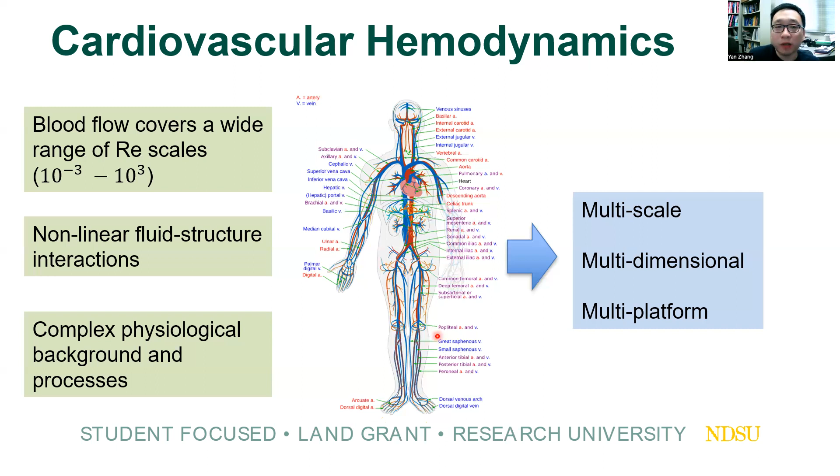And also it involves a complex physiological background, as we will show later. So it requires a multi-scale, multi-dimensional, multi-platform approach. Okay, so it requires a combination of different aspects of efforts, like computational, clinical, and also in vitro experiments to understand all the problems.

So the research method framework for this field can normally be illustrated like this. A problem in the clinical data suggests a problem, and we can use experimental and CFD tools to study the local flow details and fluid structure interaction. For example, for implantation of aortic artificial heart valves, normally patient-specific CFD simulation can be conducted first to examine the hemodynamics before the clinical surgical implementation is taking place. So that was very helpful.

On the other side, there is also system level simulation, mainly based on lumped parameter models, which can involve physiological responses. So consider this human body as a whole. It also can include very complex physiological factors that cannot be studied by experimental and CFD study. In the meantime, system level simulation can also provide initial and boundary conditions with physiological relevance to experiments and CFD. So that is also very helpful in terms of providing waveforms of pressure and flow, and also the boundary conditions.

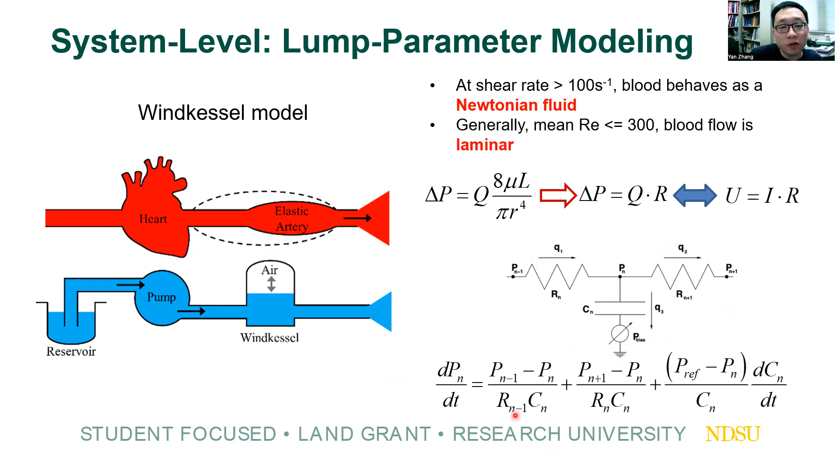Also, of course, you have the pressure outside the blood vessel, which is the interstitial pressure. It controls how much the volume can change during a heart pulse. If we build it this way, then for each Windkessel unit we can build an ordinary differential equation like this. And if we consider the human circulation, we can segregate the whole circulation into different compartments, then combine them together to build this closed circuit model.

This is built based on an open source code developed by MIT back in 2002. It consists of 21 Windkessel compartments. For example, here you have the upper body veins compartment, microcirculation, artery, etc., and the lower body, abdomen, and different organs that are important. All of these resistances and capacitances are based on physiological clinical data from literature. All together we have 21 compartments, meaning 21 ordinary differential equations. Then we can solve them using the Runge-Kutta method. And of course, there are more details; we're going to talk about them in the next few slides.

So here we need to pay attention to some of the most important circuits. First is the heart chamber, and also the lung compartment, the microcirculation, and the vein compartment. Okay. So the heart compartment, because the heart is such a unique compartment, it has 4 heart valves to control the one-directional flow. So we use diodes to regulate the one-directionality of the flow.

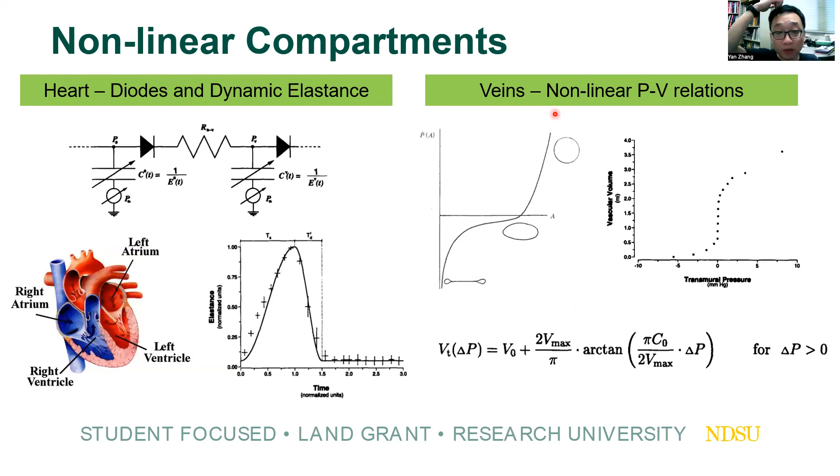Okay. On a side note, we are currently doing some research related to the nonlinear fluid structure interaction in the collapsible vein. Some of the results are shown here: we're investigating what is happening when you change the transmural pressure between the internal and external space at different Reynolds numbers. We replicate this thin-walled tube, the vein vessel fluid structure interaction. You can see as the pressure decreases slightly negative, we have this collapsing cross-sectional area.

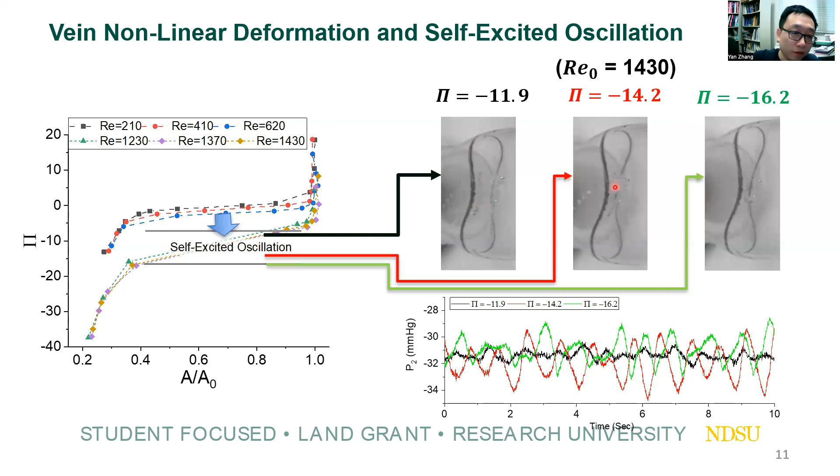And also we found that as the Reynolds number increases above a certain critical Reynolds number, it starts the self-excited oscillation, which is a well-known phenomenon in the Starling resistor. So while you have a pressure drop, it starts this kind of self-excited oscillation.

Okay, so going back to the cardiovascular system model, another unique feature of the system level simulation is that we can consider the human body as a really complex physiological system. One of the features is that our body has this short-term control system. So for example, if the blood pressure is under certain situations, we have these sympathetic and parasympathetic signals that can control our system to adjust the blood pressure, either going up or going down, right?

So for example, in fight or flight situations, when you become nervous, the autonomic nervous system will signal the sympathetic nervous system to give a plus signal to increase the heart rate and also contractility, the resistance of the arteries and the venous tone, so that you can adjust the blood pressure accordingly. Under other situations, the parasympathetic signals will be activated, giving the opposite signal to decrease the heart rate, resistance and venous tone, changing the blood pressure in the opposite direction.

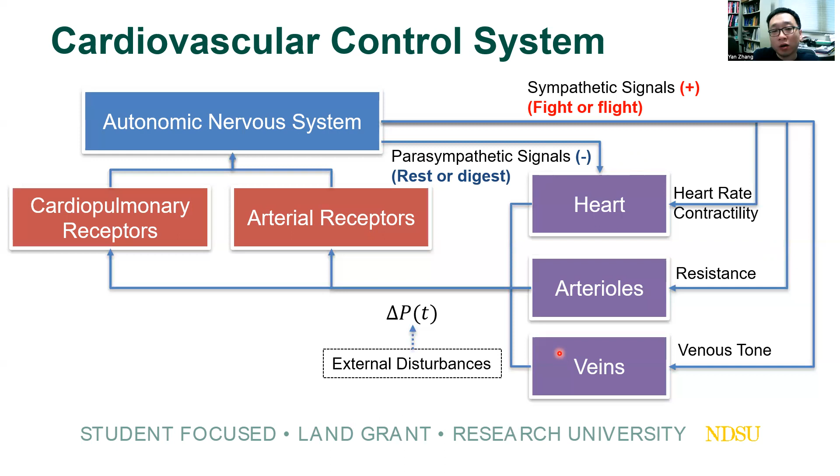So in the cardiovascular system model, we also consider this as a set point control algorithm, based on the clinical data. So overall, by solving these 21 equations with all these physiological data and the control system, we are able to generate a realistic physiological output from the CVSim model. So here is an example of the pressure waveform we generated for different pressure nodes, including left atrial, left ventricle, and the systemic artery and the venous pressure.

So you can see it represents the pressure wave pretty well. It can generate beat by beat hemodynamics at all different locations, on a time scale of seconds. However, it does not have long-term effects, and it represents a closed fluid system, with no input and output. So later on, we will show that we modify the system to study different kinds of physiological problems.

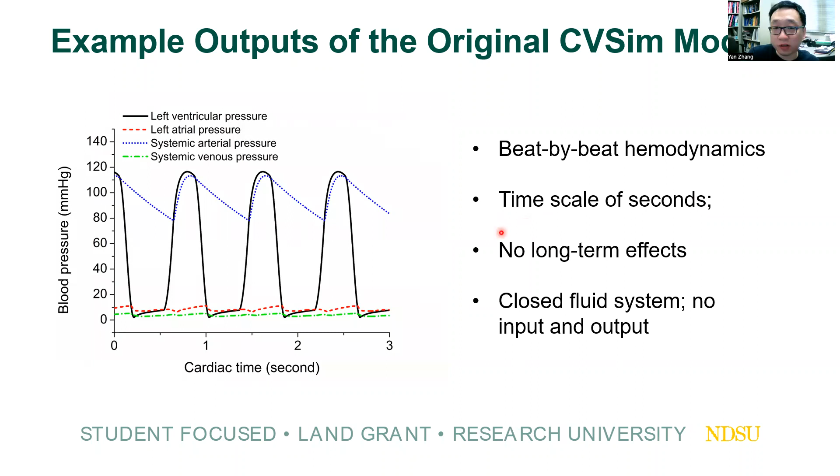The first example application I'm gonna talk about is the digital astronaut project. This is a project funded by NASA to study how a person's hemodynamic parameters can change with microgravity exposure for a very short time, and also the effectiveness of countermeasures to counterbalance these changes, using a numerical model.

So we're using that CVSim model to simulate this kind of short-term effects. As we all know, the astronauts go to the microgravity environment, so the blood will actually shift toward the upper body, toward the head, because there's a lack of gravitational pull, right? Under Earth gravity, the blood pressure in the legs is actually much higher than the heart level because of the hydrostatic pressure gradient, and in the head it is much lower than the heart level.

But in microgravity, the gravitational gradient disappears, so the pressure is actually more uniform. It results in the blood shift from lower body to upper body. This can cause a lot of different problems, including the puffy face. The face will look really dilated, and also impaired vision because the blood will pool in the eyes. Also orthostatic intolerance: when astronauts go back to Earth's gravity, they cannot stand up because the blood pressure cannot go back to the head immediately because of that adaptation.

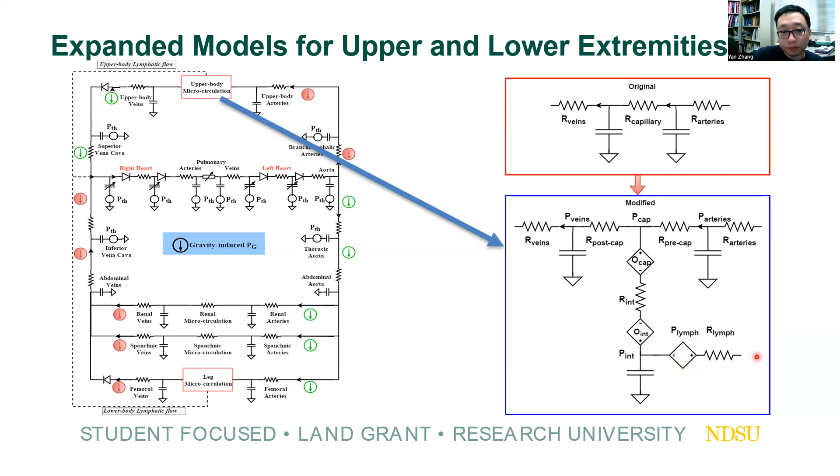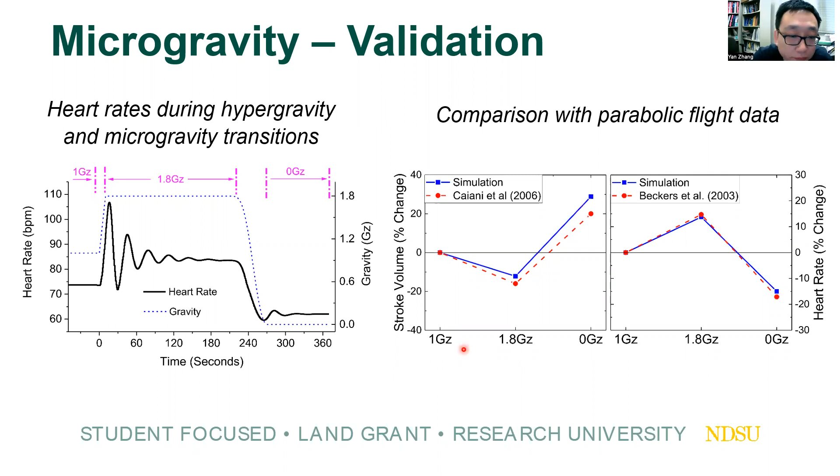Also, our model predicted the headward fluid shift. You see here the blue line representing the lower body vein blood volume. You can see that it really decreased and shifted to the upper body vein after the transition. And you see the blood pressures of the upper body and lower body actually approaching each other, representing a more uniform pressure gradient.

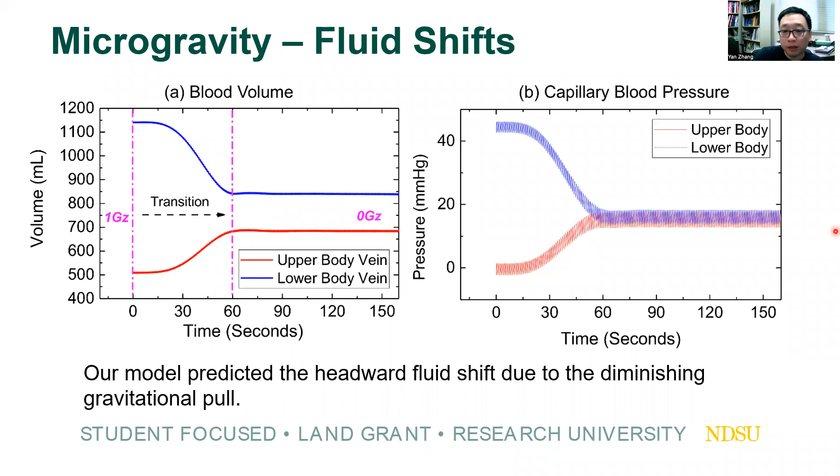We also tried to simulate the lower body negative pressure. You can see here it is 1G and suddenly becomes 0G. Then once the LBNP mechanism is activated, you can see the heart rate and central venous pressure are both restored to some degree. Really, you can see that a negative 30 millimeter mercury LBNP is pretty effective in restoring the hemodynamics under microgravity.

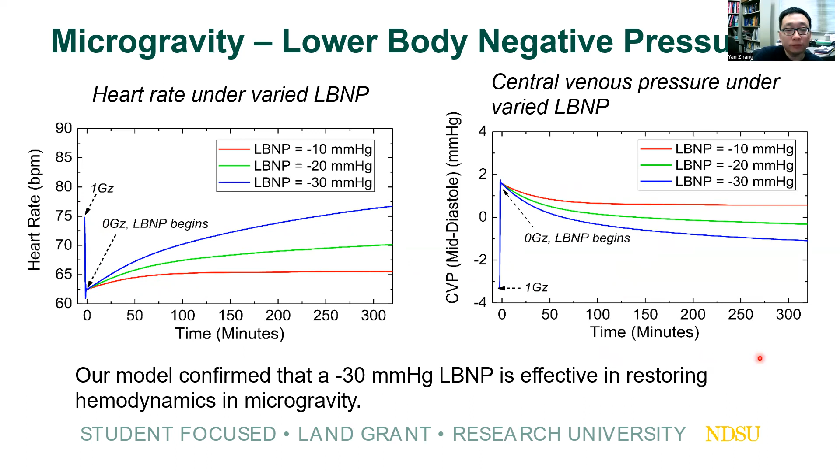So the second application is that we also want to study the longer term effects of the CVSIM model, because that model is really beat-by-beat hemodynamics. It does not have any input and output of fluids. So we want to include this water intake and also water exit, and also simulate the long-term effects, which are controlled by the kidney.

So we want to add the renal system model, or kidney model, into CVSIM so that we can study the effect of disturbances in the longer term. For example, high sodium and low sodium intake and water intake on hemodynamics. This is actually earlier research motivated by the effects of high sodium intake on blood pressure. So we include the renal system model, and we know that the kidney is a really sophisticated filtration system.

The kidney actually consists of a million of these small units we call the glomerulus unit, which works to filtrate the water and electrolytes at different locations. So the artery goes in and the filtration goes on. After filtration, the blood flows back through the vein. Then the excretion gets out of the body through the urine flow.

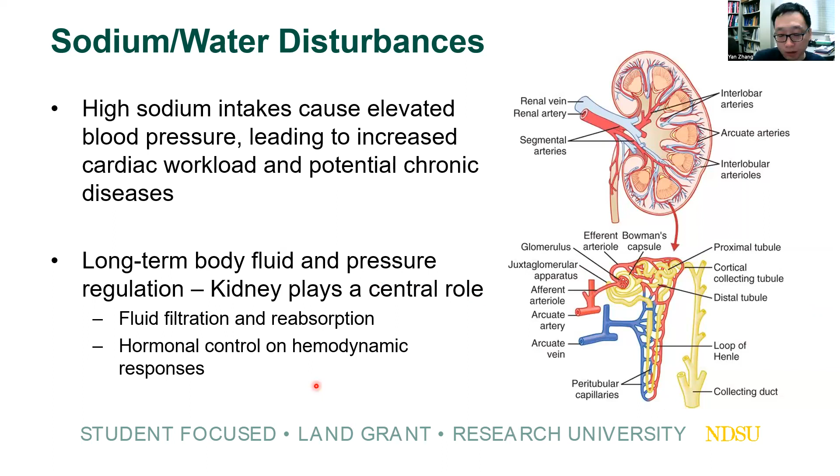In the meantime, the kidney is also a long-term control organ that excretes hormones to regulate blood pressure. So those are the two functionalities of the kidney, which are important for long-term hemodynamics. So we modeled the renal system in this green block. Really complex functions, but most of them are either ordinary differential equations or algebraic equations from

the literature data. So basically it takes the blood flow from the CVSIM model, filtrates this water through this entire process, and then feeds back into the venous return of the CVSIM model. In the meantime, it also has hormone concentration modules to control blood pressure and blood flow. So basically it added another 69 equations.

And again, it is solved with the Runge-Kutta fourth order method. This time it can use a larger time step because it's longer term; we simulated with a time step of 1 minute. And it can simulate effects of different disturbances on a time scale of days. So we can use this modified CVSIM model to simulate different time scales of hemodynamics, for example, water intake effects on the time scale of hours.

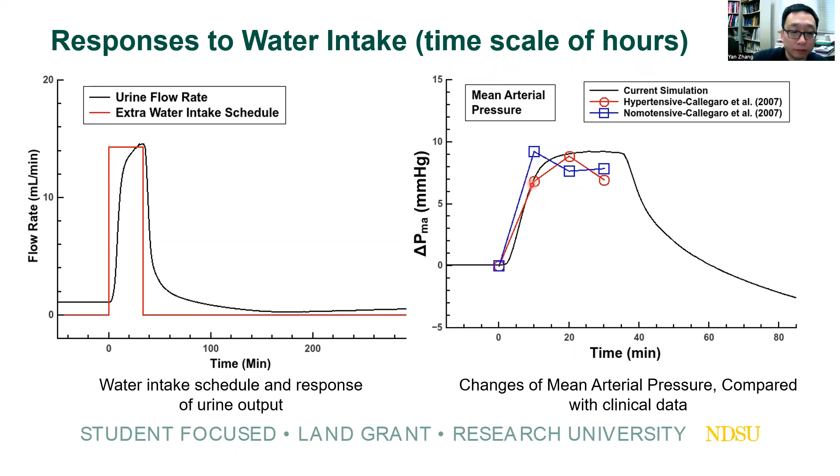For example, if you take water in this time window, we simulated the urine flow rate responses and also the mean arterial pressure. This compared with some clinical data pretty well. We then used this model to simulate the long-term effect of sodium intake on hemodynamics. For example, here we simulated some of the clinical results. Here we have a regular sodium intake. Then for 2 days, we doubled the sodium intake and then restricted the sodium intake in the longer term.

What we found is that the plasma sodium concentration change matches well with the clinical data. And here you can see the urine flow matches well, and different hormone concentrations in the blood also match the results pretty well. So using that, we can study the sodium restriction effect on arterial and heart hemodynamics. Here we studied a restriction of sodium intake. You see different steps of restriction.

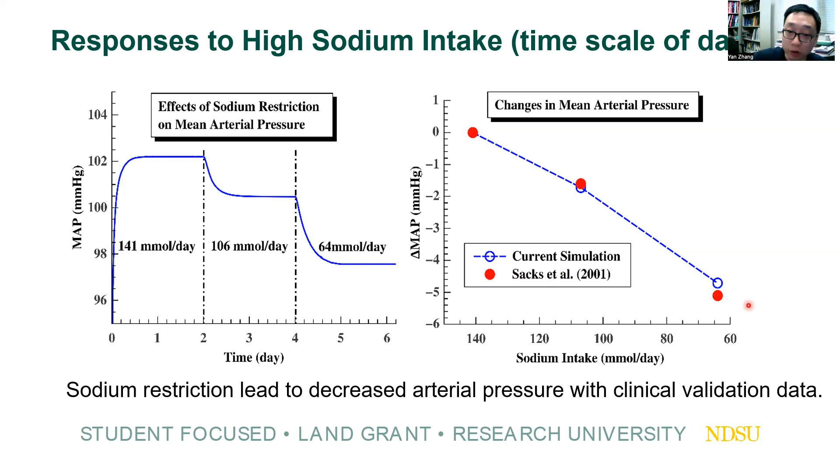You can see once it stabilized, the mean arterial pressure actually drops about 1.5 to 5 millimeters of mercury in the long term, which matches these clinical data pretty well. We are also able to show the pressure-volume loop of left ventricle work. As the sodium restriction occurs, from 300 millimole per day to 64 millimole per day, you see the loop is actually shifting to this side.

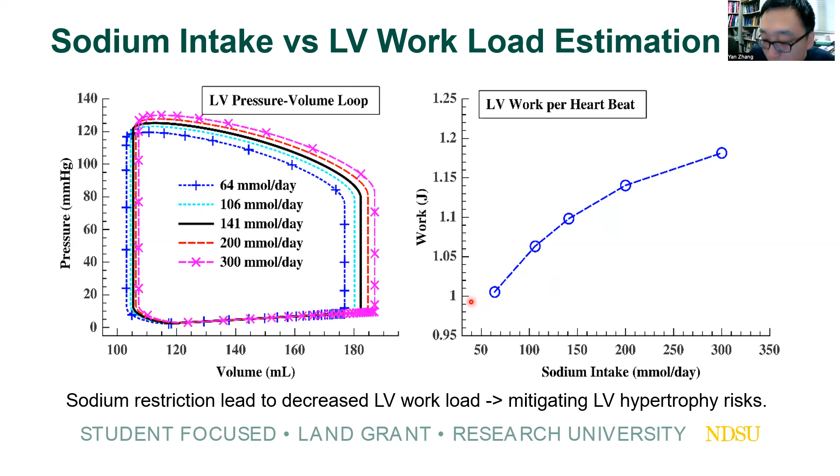Also, the area is smaller, meaning that the pressure and volume actually decrease, and the total work is also decreasing. If you calculate the area, that's the workload of the left ventricle. You see that with sodium restriction, the workload is actually decreasing, as predicted by the model. So it leads to a mitigation of the risk of left ventricular hypertrophy in the long term. That confirms some of the common agreement in this clinical field.

As a summary of this part, we modified the open source lumped parameter model, CVSIM. It turns out to be a very powerful and expandable tool for different physiological and physical phenomena of the cardiovascular system. It can be extended with different functionality. It can study hemodynamics on time scales of minutes, hours, days, or even longer. So it's very useful in that sense. But of course, more validation is needed; more valid physiological data is needed to improve the model in the future.

The lumped parameter model can also be used as a very good tool to provide boundary conditions, pressure and flow waveforms, for CFD, FSI, and experimental studies of local hemodynamics in the future. So that's the first part of my talk. In the second part of my talk, I'm going through some of the in vitro cardiovascular flow experiments that we have done, including heart valve, aortic arch, and left atrial appendage, to study some local blood flow phenomena.

So the motivation in our lab is that we want to study cardiovascular system hemodynamics, because cardiovascular disease is a leading cause of death. About 20% of deaths in 2021 in the United States resulted from cardiovascular disease, either atherosclerosis, stroke, arrhythmia, or heart valve complications. These are some of the really common situations. The population of patients with CVD is also increasing dramatically in recent years.

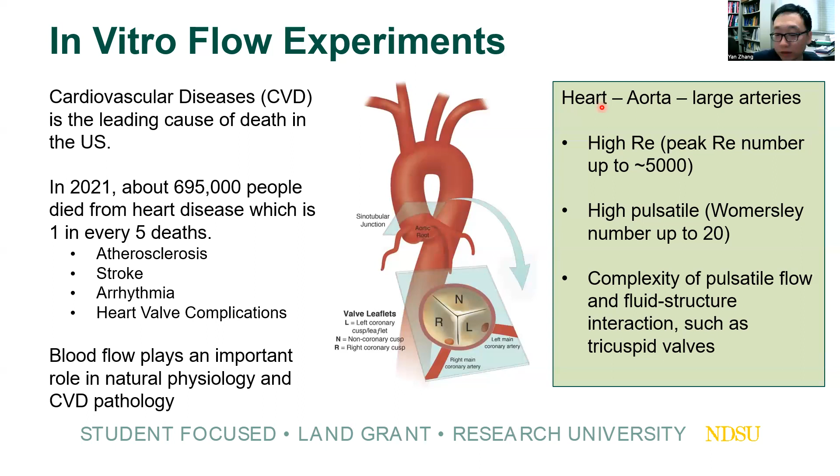So in our lab, we actually established a cardiovascular flow simulator, something like this. We have a programmable pulsatile waveform generator, so we can generate any arbitrary user-defined waveforms. We have the pump head to control the one-directional flow. Then we have high-speed sensors, pressure sensors to monitor the pressure, and the test section used to host the models.

And then we have compliance and resistance units to regulate the pressure and volume relations, as represented in system-level cardiovascular simulation. So we want to adjust the pressure volume relation, and then the fluid reservoir to mix the particle seeding and also serve as the holder for the entire fluid. So this can be used for PIV measurements. It can be synchronized with the PIV laser and the cameras.

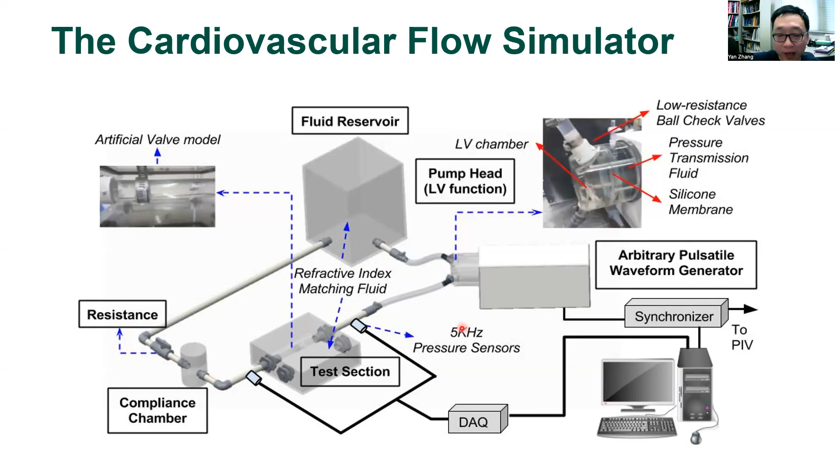And we can do refractive index matching, because we're currently using a lot of PDMS silicone models to allow optical access. That's the main thing we're using right now. As for the optical flow visualization, we're doing PIV. For particles we're normally using polyamide microspheres.

Refractive index matching is very important, because a lot of these models have a complex circular cross-section resulting in optical distortion. So we use water-glycerol mixtures, about 40% water and 60% glycerol, which have relatively the same index of refraction as the PDMS material. As you can see the result of the matching, afterwards the distortion is basically eliminated

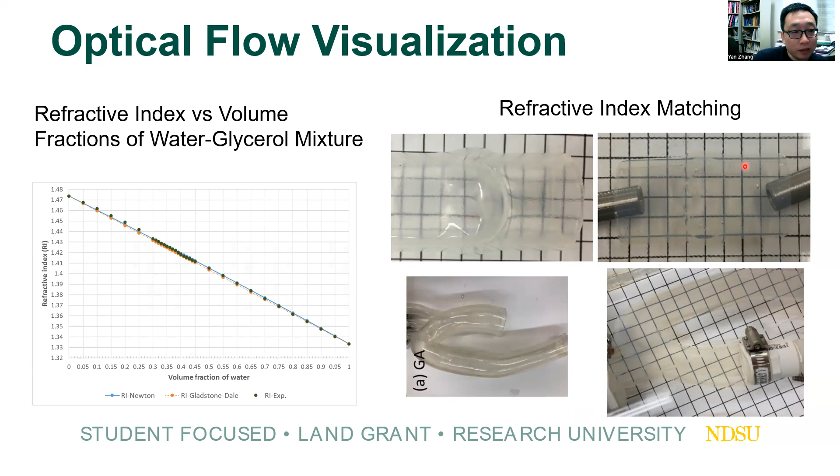from the model. Using the pump, we can generate pulsating waveforms, something like this. You can see here what we call systole, the contraction phase of the flow, resulting in a larger pressure gradient and flow. And then we have the diastole period, which is an expansion of the pump. With the one-directional valve here, you see we can actually get to zero flow during the diastole period. So we can study different kinds of flow rates and heart rates.

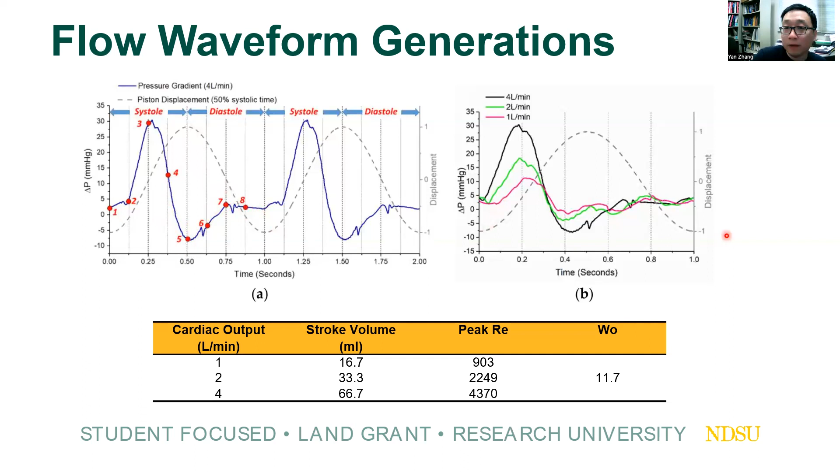So here's one PIV result of the pulsating flow passing the aortic valve. We're studying what the flow passing these tricuspid valves looks like, and how that interacts with different structure deformations. You can see at different phases of the pulsating flow, we can observe different jet flow patterns. At the peak, there's a jet in the center, and in the diastole phases, you can see the valve is actually closing, resulting in non-uniform jet flow towards the end of the systole phase.

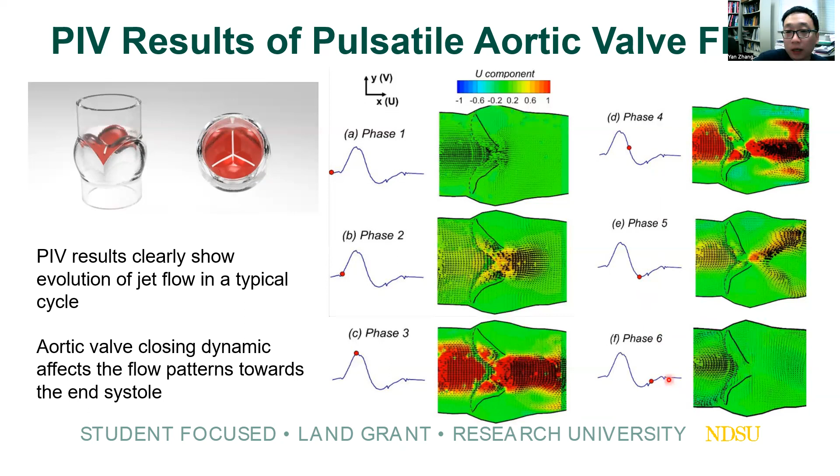And then we can also estimate the deformation of the aortic valve, because this PDMS is made of soft material. Even though that material is a linear elastic model, which is not actual real tissue, we actually can see some of the trend of how they deform under pulsating flow conditions.

So we measure the area strain, which is the change of this cross-sectional area at the different locations under different flow rates and different phases. So you can see here that the aortic annulus normally represents the largest strain, regardless of the flow rate, right? So this orange bar shows the area strain of the annulus is the greatest, which is before the aortic valve. And also, in the time axis, you can see the area strain of the aortic annulus is actually changing earlier than the peak, before the peak of the flow.

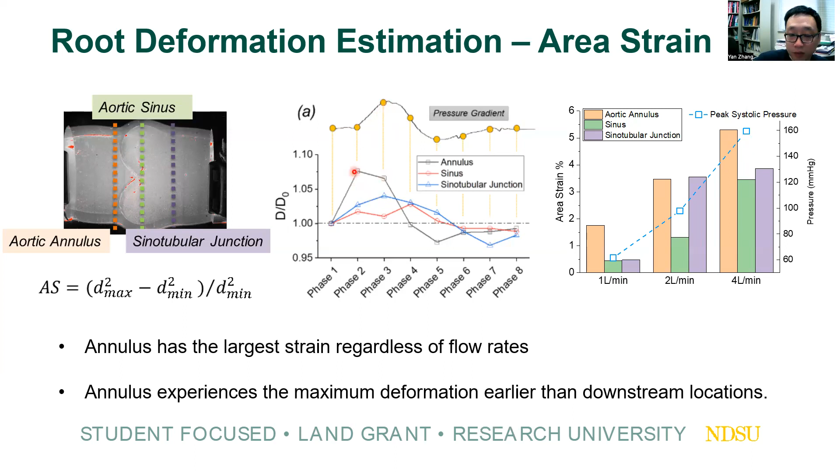We also studied aortic valve stenosis. We manufactured another aortic valve with silicone molding, which represents a really, really high Young's modulus. So this one represents a real severe stenosis calcification, and this original one represents a really mild calcification. Compared to the real tissue, it's a little bit stiffer, and this one is more severe.

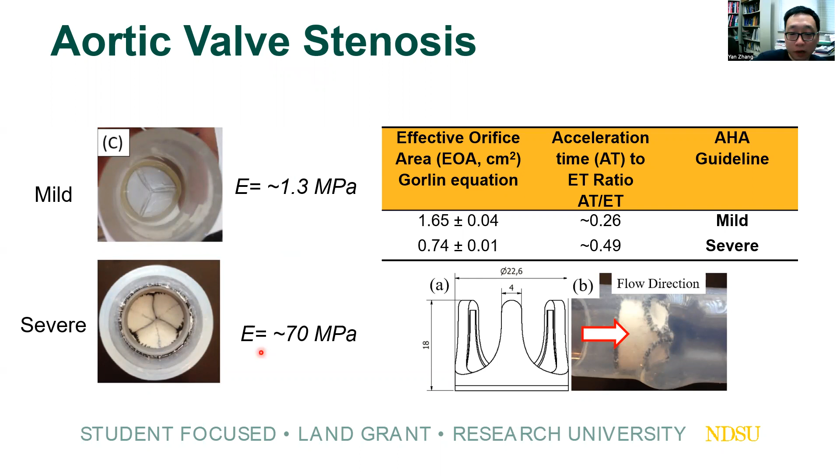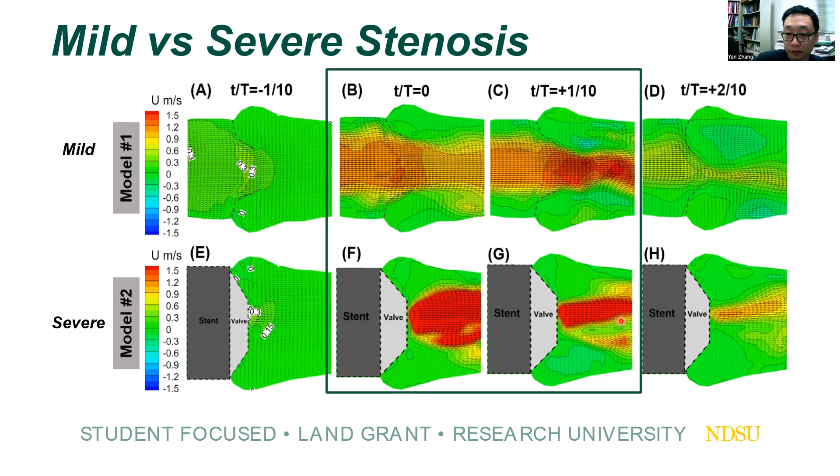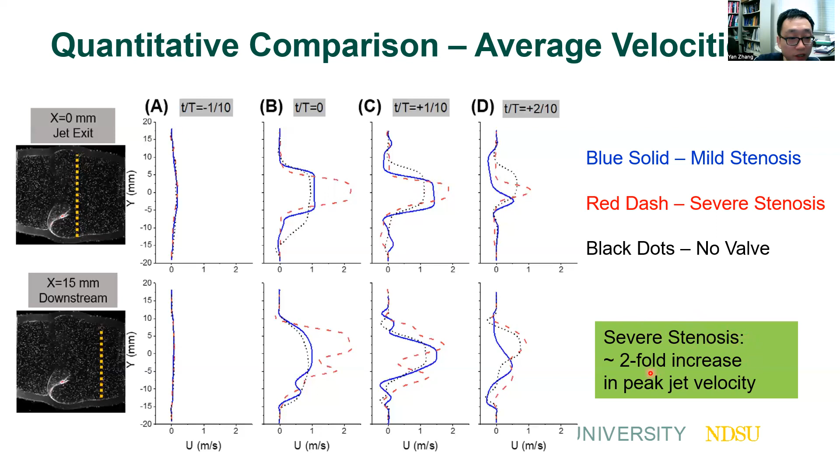So you can see the jet velocity here is really, really high under the severe stenosis case. The mild stenosis case is actually pretty comparable with the no valve case. So the severe stenosis caused a twofold increase in the peak jet velocity, and also turbulence. If you compare the turbulence intensity at different locations, both of the valve conditions result in turbulence intensity higher than no valve conditions, especially severe stenosis, which resulted in really high turbulence after the peak flow. So it causes about a 3-fold increase in turbulence intensity.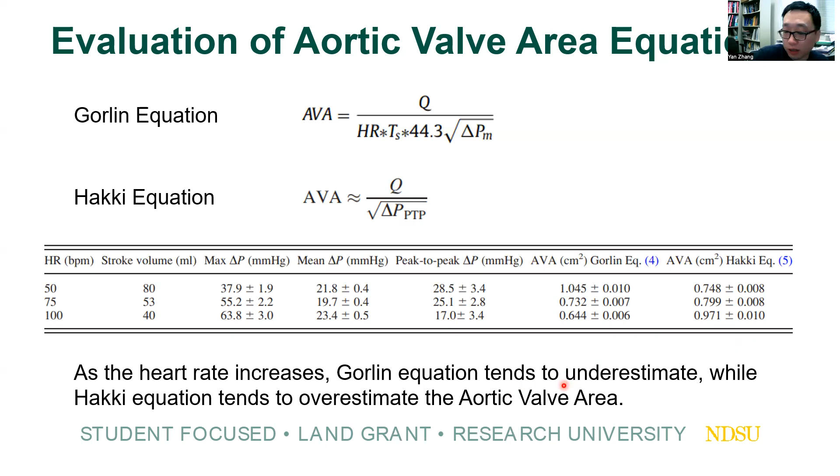So the second type of research we've done is aortic arch hemodynamics. We focus on the deformed aortic arch after surgery for coarctation of the aorta. Coarctation is basically a narrowing of the aortic arch, normally in congenital heart disease, and a lot of babies are born with this condition. After the surgery to remove this section, a lot of patients develop different kinds of deformations of the aortic arch. One of them is really sharp; we call it the Gothic arch.

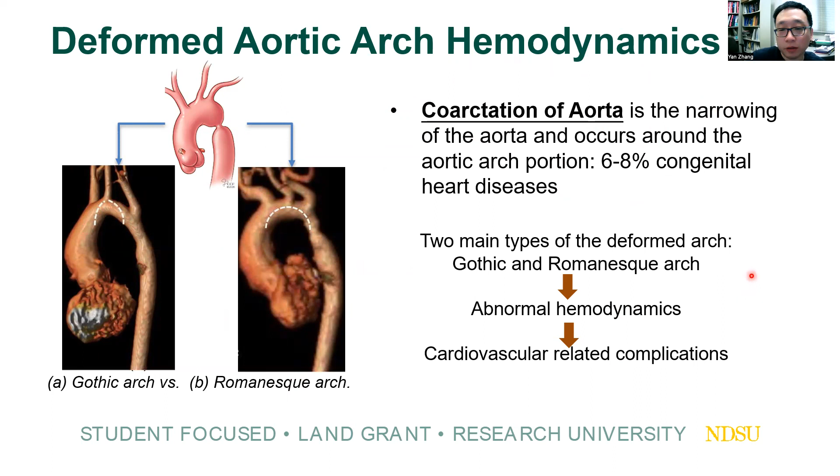The other is Romanesque, which is really round. These two names come from European architecture styles, right? Gothic is really high, tall and sharp, and Romanesque is a really round arch. So these different deformations result in different hemodynamics. What we wanted to do is to reveal the flow structures, so we did tomographic PIV on this problem.

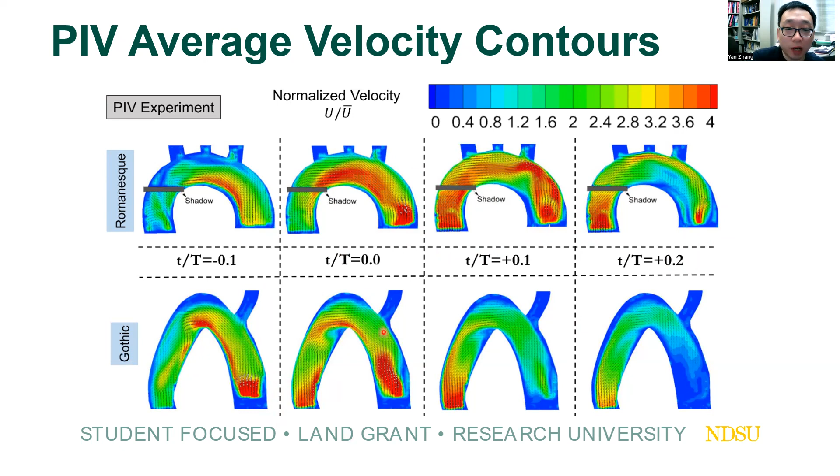So you can see here, the flow is going from right to left. In the round Romanesque model, the flow is pretty uniform in the cycle, while in the Gothic, large flow separation and stagnation occurred. On the top you can see the flow stagnation, almost zero velocity near the top, and flow separation occurs around this sharp curvature. We also collaborated with CFD simulation here, and the CFD results match the PIV pretty well.

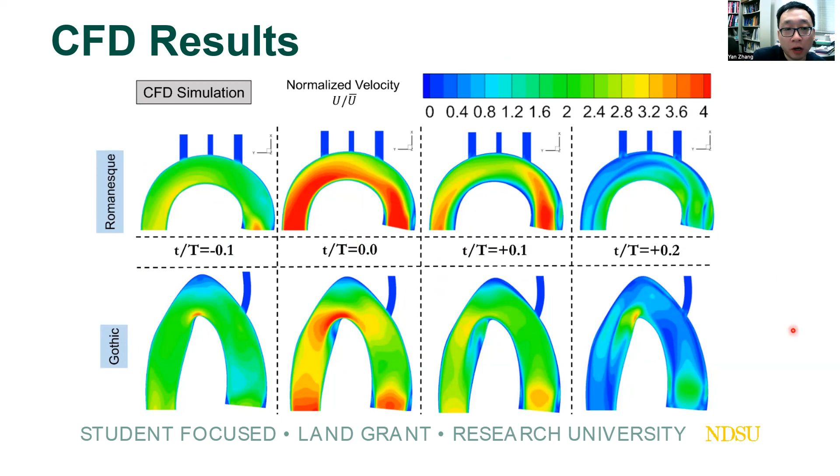And one of the interesting features here is because of this arch, it has a secondary flow motion due to the centrifugal force of the flow. So we cut the top here. We look at the cross section at the top. So here is a CFD simulation of the secondary flow.

You can see here. Here you have a regular secondary flow around a normal circular pipe. See, the vortices developed during this cycle are pretty uniform. But for the Gothic result, you can see here it's an irregular, abnormal secondary vortices, smaller in size and also stronger in magnitude towards the bottom.

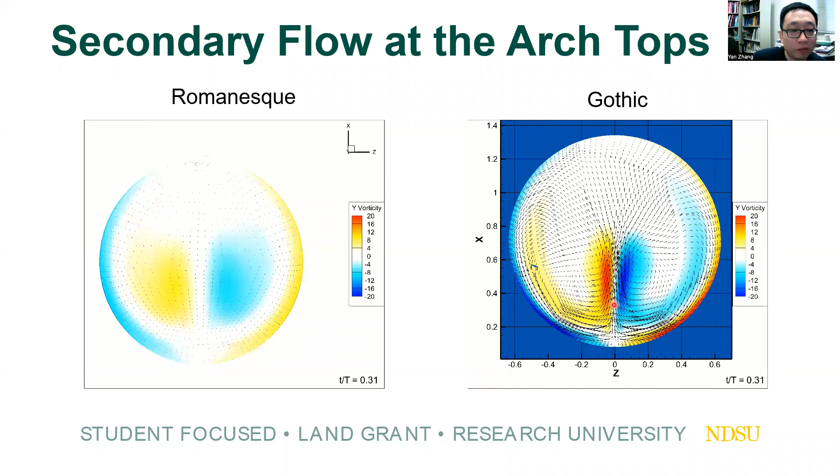So here we compare these results, CFD and tomographic. You can see here the velocity in the Gothic aortic arch is really concentrated near the bottom. So the top is really low velocity, and also the vortices are irregular and concentrated near the bottom. Okay, and then the normal Romanesque model has regular secondary flow structures.

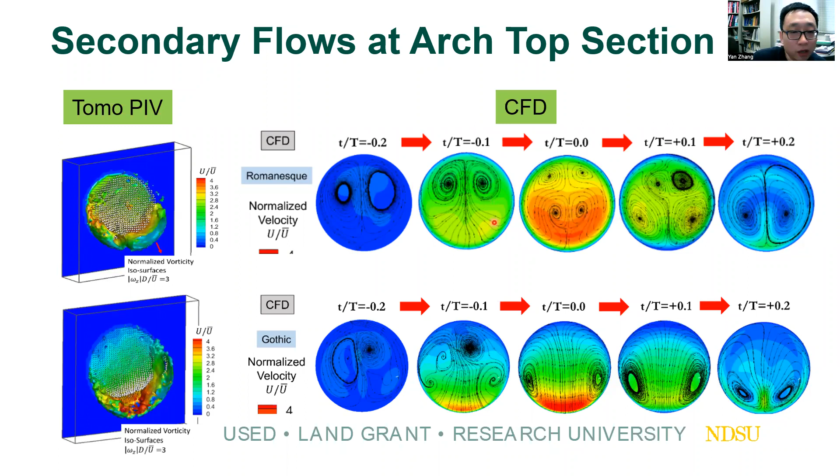And from CFD, we were also able to simulate the wall shear stress under these two conditions. You can see here the Gothic aortic arch really resulted in a large non-uniform wall shear stress distribution. You have really high wall shear stress here and low wall shear stress because of flow separation and stagnation. So the large variations of the wall shear stress normally result in high risks of cardiovascular complications in these patients.

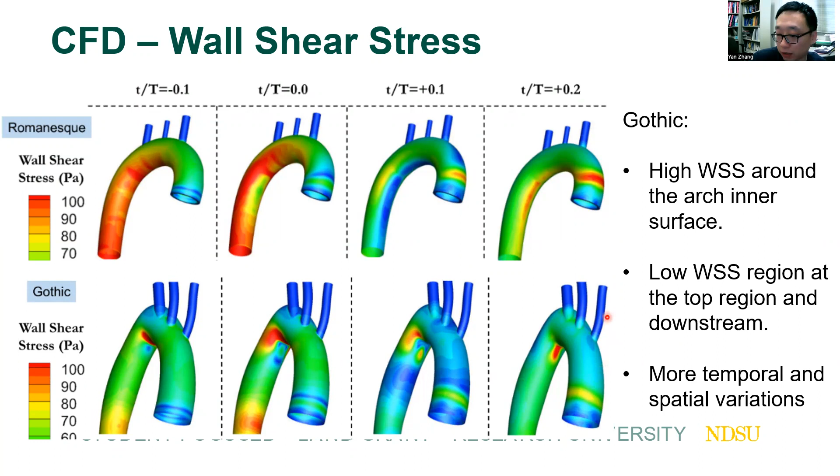The last topic I want to present is the left atrium and appendage. So the left atrium is a really sophisticated chamber of the heart that has not received much attention from this field of study. Because the left atrium is above the left ventricle, it's a heart chamber that supplies blood to the left ventricle. So there are four inlets. The four inlets are the pulmonary veins.

So the blood from the lung actually goes into the left atrium, mixes here, and then is sucked by the left ventricle each cycle. So it has one outlet, and here is the mitral valve, regulating the one-directional flow. So it's a very important chamber because a lot of patients actually develop disease in this kind of chamber. One of the most common diseases is arrhythmia, with atrial fibrillation.

Atrial fibrillation is very, very common, and is caused by the irregular electrical signal in the chamber wall, causing the left atrium to not pump regularly; instead, with the irregular electric signal, the pressure basically dissipated. Okay, so it does not have the regular waveform. It affects more than 5 million patients in the United States alone.

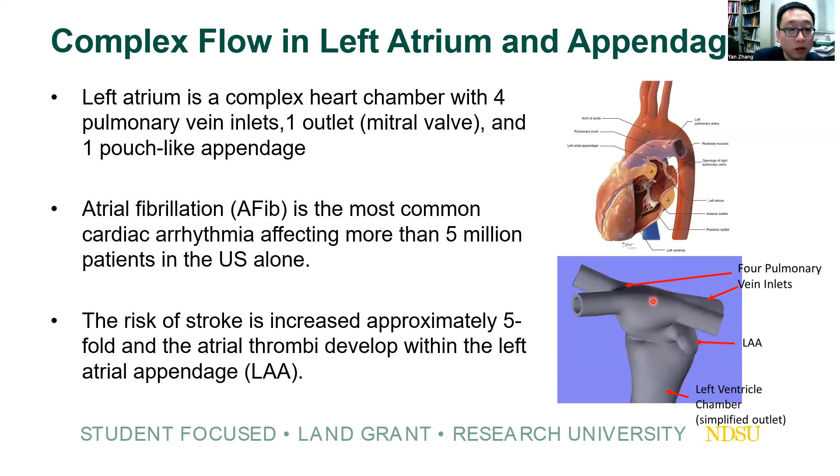So in our model, we want to study what kind of flow condition will change the flow condition in the pouch. In the meantime, we're also trying to study the flow patterns in the left atrial chamber, which almost nobody has done before, but which is still ongoing research. So first step, we simulated this kind of flow using a simple flow past a deep cavity model. So we built this two-dimensional cavity.

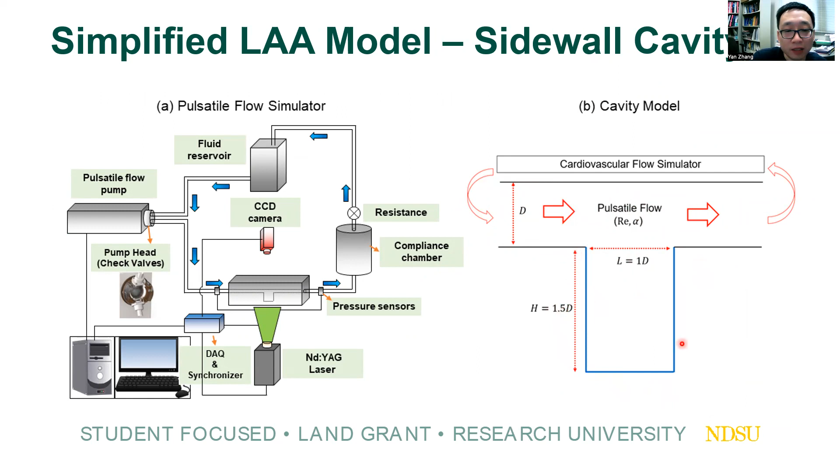So here we have a pulsating flow through this chamber. Now we have this deep rectangular cavity, 1.5 aspect ratio. So we simulated different Reynolds numbers and Womersley numbers representing the typical range of the left atrium flow. So you can see that the waveform, if you normalize it, represents similar waveforms. Okay, so flow is going in the systole, acceleration, deceleration, and diastole is almost zero because of the valve.

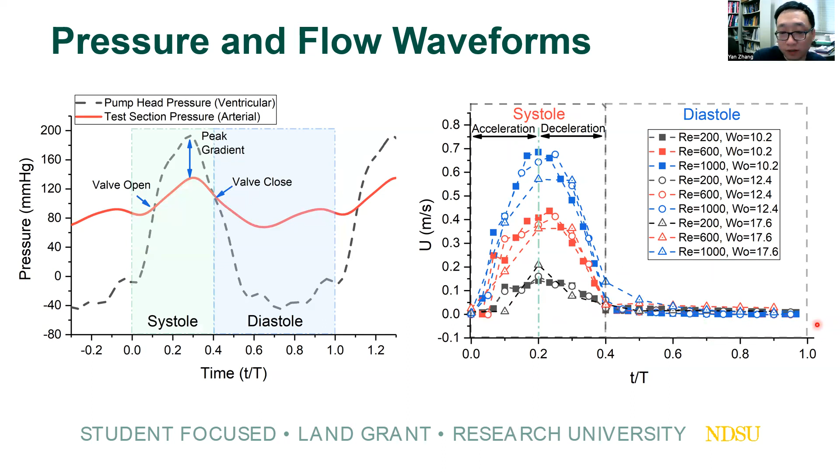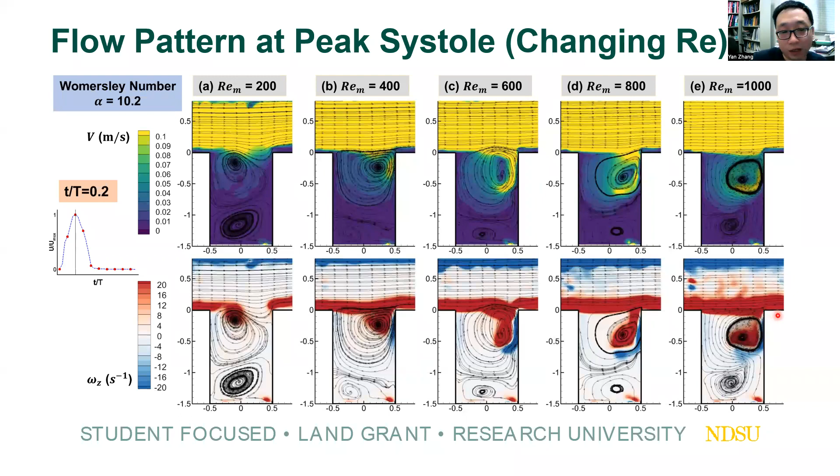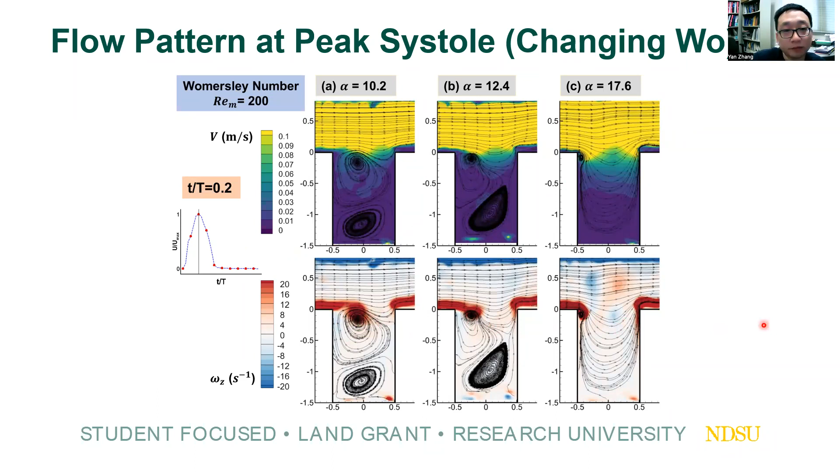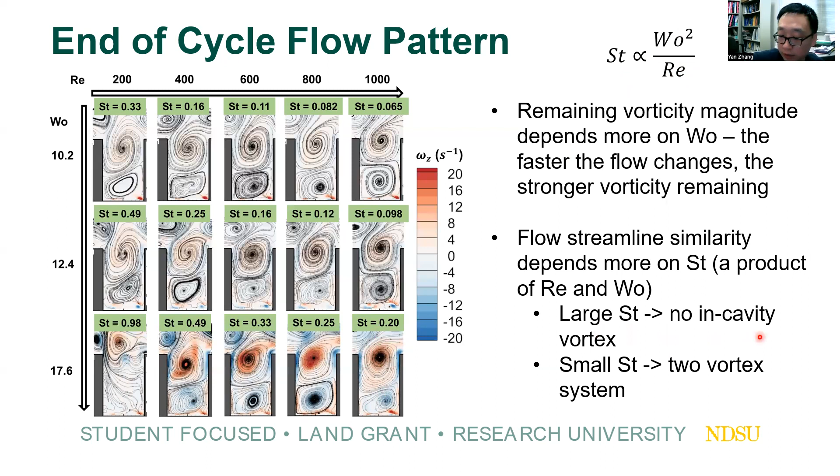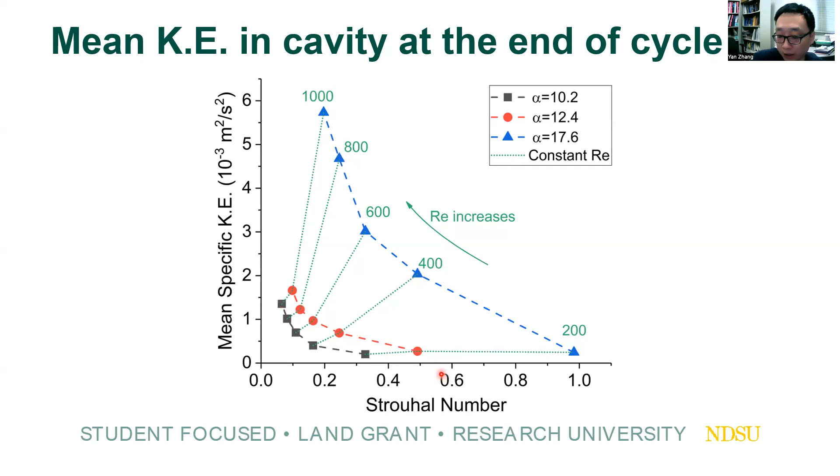Lastly, there's some ongoing research where we're doing tomographic PIV measurements on the real left atrium model. The challenge here is that this chamber is really, really complex. It has 4 inlets, the jets impact each other, and it also has irregular geometry. The flow is really complex too and turbulent. So we want to do the tomographic measurements of 3-dimensional flow in 2 directions like this because we are limited in space for the volume illumination.

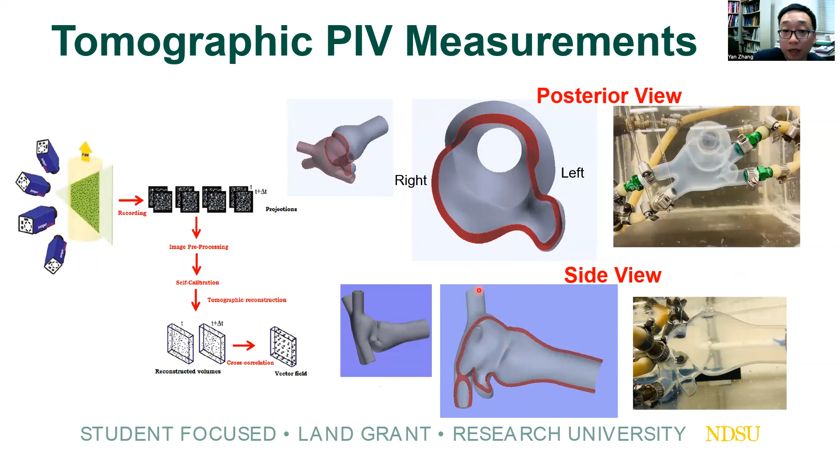So here are some videos showing the actual pumping of the left ventricle. Just a reminder that we don't have the mitral valve constructed between the left ventricle and the left atrium model. So you see here the flow coming into the chamber through 4 inlets. And we're simulating the left atrium waveform, which is double peak. The first peak is by the left ventricle suction. The second peak is its own pumping. So we simplified it to two waveforms in the inlet boundary condition.

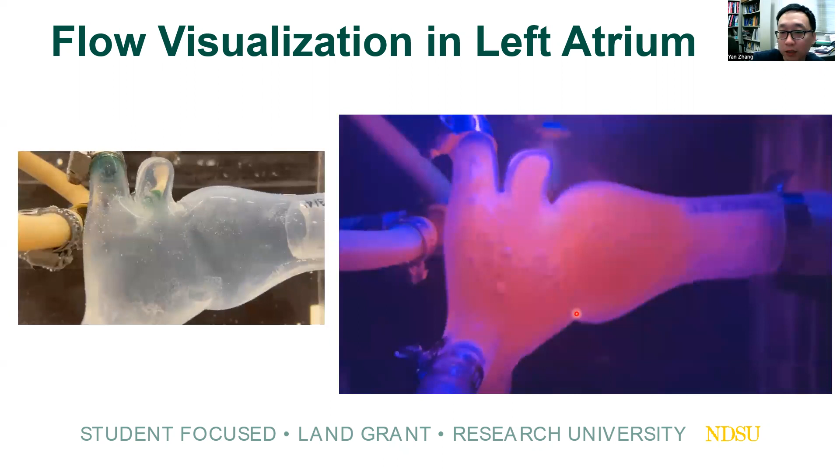So here you can see that the flow is really, really complex, as suggested by the dye illumination here. You see really swirling, turbulent and pulsating conditions. The boundary condition is generated by the CVSIM model. So this is a double peak of the mitral valve. The first peak, we call the E wave, is caused by the suction of the ventricle. The second is the A wave, by the pumping of the left atrium itself. So this is representing a healthy left atrium.

So in atrial fibrillation cases, the patients lose the A wave, meaning its pumping function is lost because the electrical signal is irregular. So the red dashed line is the patient condition AFib flow, which is only one wave.

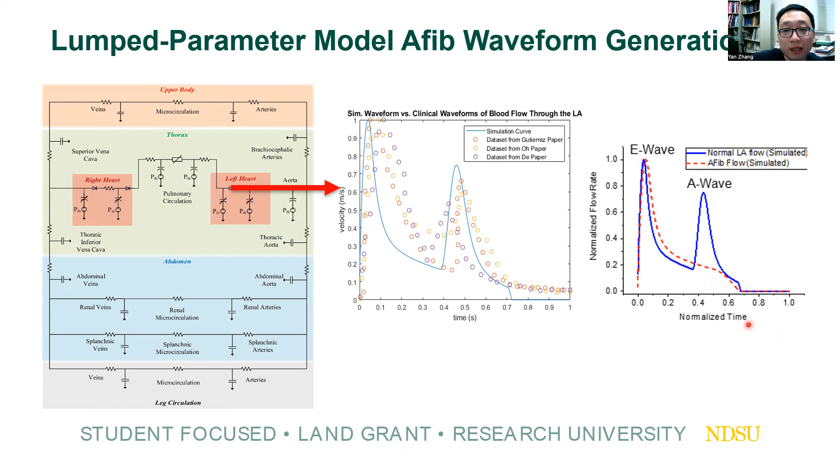So we simulated this in the posterior view. You can see the tomographic measurements actually give us a pretty good view of this vertical big vortex system in the cycle. So this is a normal healthy waveform. You can see this double peak. The red color appears twice in the cycle, and a continuing vortex

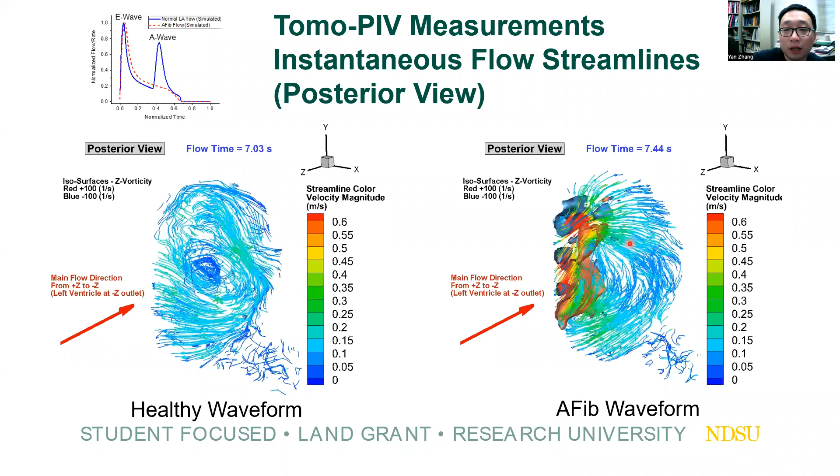inside this left atrium. This is the AFib waveform. You can see here is only one wave, and then the flow velocity becomes very low for the rest of the time in the cycle. And if you compare this magnitude at the different time steps, you see that the healthy ones get really uniform high velocity throughout the ejection most of the time, but the AFib really lacks high velocity for the majority of the cycle.

So it can cause problems. If you compare, at each time step, the kinetic energy distribution in this slice, you see that AFib really has low kinetic energy for most of the time during the cycle. So it can cause blood stasis in the chamber, also the atrial appendage. So that might be a contributing factor for the stasis and the blood thrombosis to occur.

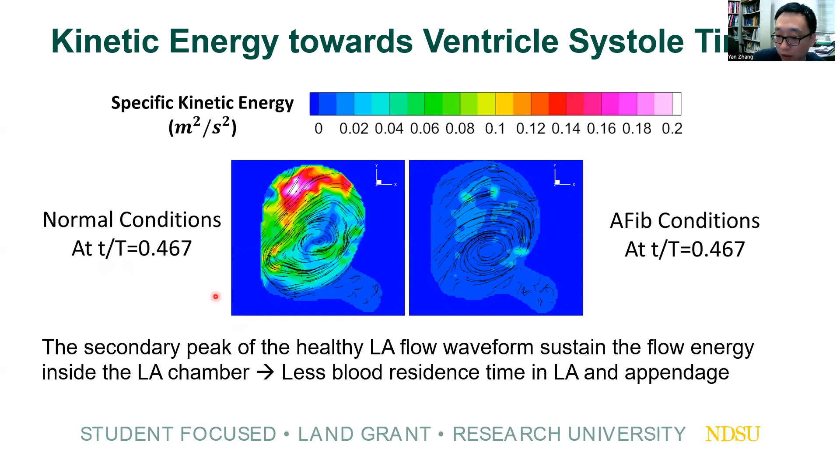So just a summary. We reviewed some of our work in local flow visualization for different kinds of problems. As you can see, most of the problems show strong pulsatility, three-dimensionality, and fluid structure interaction is really complex. So that demands high quality flow measurements because there's really a lack of validation database for CFD simulations.

It's really complex flow, so there's a lot of chances for future computational and experimental simulation of these problems. And also combining system level mathematical modeling helps with the in vitro experiments and the CFD because it can provide some of the boundary conditions that we are not able to get easily from the clinical data.